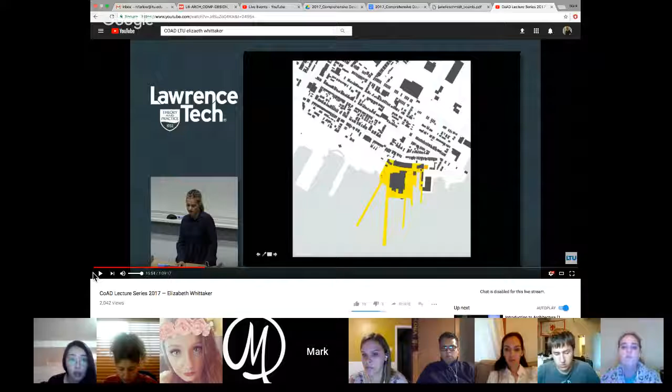Like Beacon Hill, but very much the triple-decker, which they surprisingly romanticize. But incredible views to the city, and it's really starting to boom in this area because it's one of the last frontiers that's still somewhat affordable. So we were lucky to get this project, which is right next to an active shipyard. The west side of our site, and the triple-decker flanking the east. So there is probably, just FYI, a six or seven months, sometimes longer, intense process with the neighborhood where you're meeting every month, showing them schemes, and a lot of opposition. And we were really thrilled after we talked through the narrative of the site and how much we loved the shipyard that they maybe had forgotten about.

Well, the architecture, and not just the architecture, but the modern spirit of this space with this artist community that actually works on these incredibly large and fantastic sculptures that you see here. This is right across from our site. That's our site before we built it. And so how could that become the actual stronger context? We work a lot in this historical fabric, which I think is why Bedrock hired us to work with them on Brush Park, because we knew we had to somehow marry these beautiful old mansions and the preservation of those with this contemporary architecture. So this is our site, again, flanked by the shipyard and the triple-decker. So there's a lot of this.

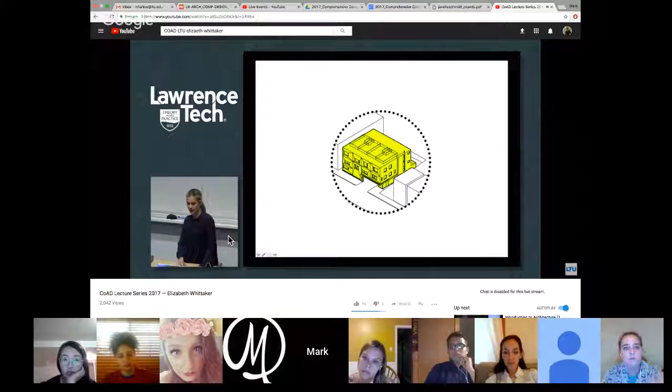And so what we did is we really had to maximize the front facade because that was our only chance of view and light. There's a back, but it's very much a back. There is no view, there's a little bit of light.

And then the tricky thing with housing, so we really geek out on unit typologies and the kind of unit. So we think of them in a very pure way in the beginning. Is it a floor through? Is it a maisonette? Is it a flat? And so on. So we had to put 9 units in this project, which was super tight. And then we had to incorporate 2 means of egress.

And I know you might glaze over, but these particulars of housing are really hard. And Europe doesn't have to do it. And so therefore they have really amazing housing, and it's really tough, sometimes it's not, but often it is, to incorporate this, in this case, a cross-grain common corridor through the units. So how does that work?

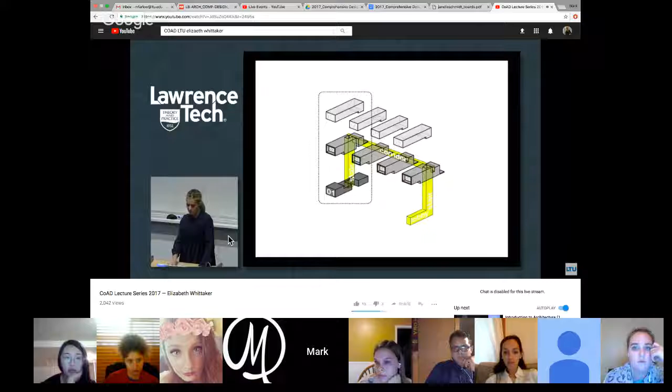So the good news is, as it often does in architecture, what is a problem becomes maybe its best asset. And it forced us to do these mezzanine units, which are really low ceilings, but voluminous because they open up to these double height spaces that face the water. So we literally went under and over this skewered common corridor through the building.

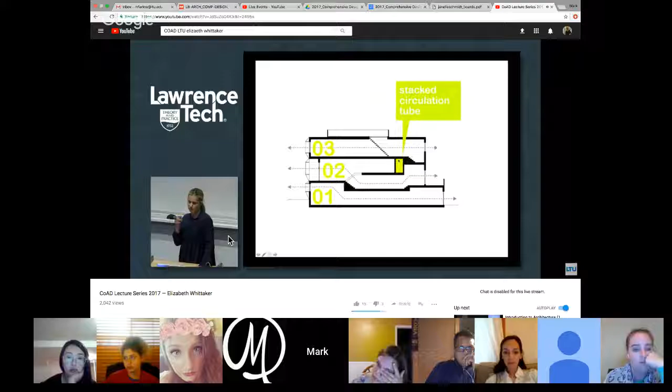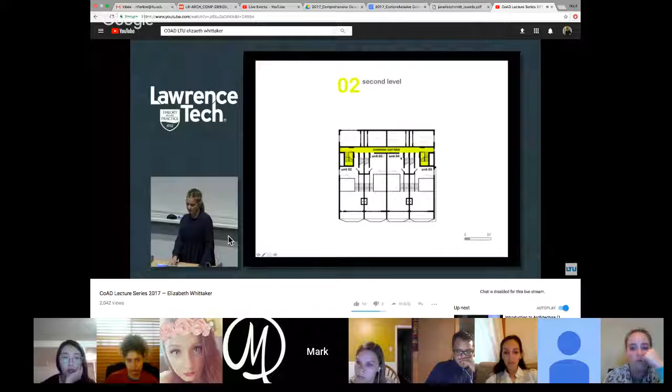And so ground floor, we also had to pack in 9 parking spaces, 1 for each unit, 2 stairs. Second floor, they still have private entries. It's the 3rd floor, the second level, excuse me, we call it the second here, where we have the common corridor that then accesses all the units. So you have to really figure out how to game code, especially in this country. And so this is how we conceived of it.

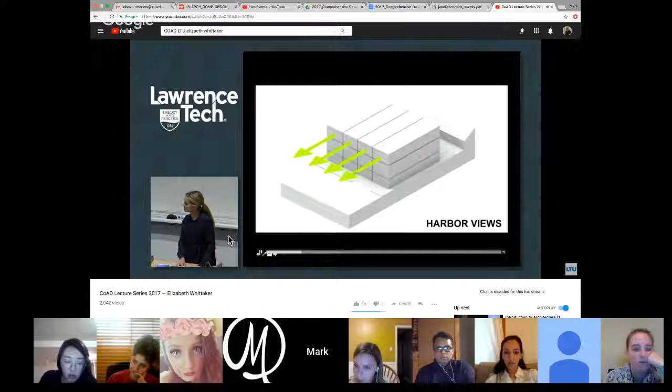So just a quick, simple animation about the 9 tubes. So we stack the tubes, if it's gonna go. Maybe not, okay. All right, maximize the views. Had to carve out for the parking. We could only go 3 feet below grade because of the water table. We're right next to the ocean.

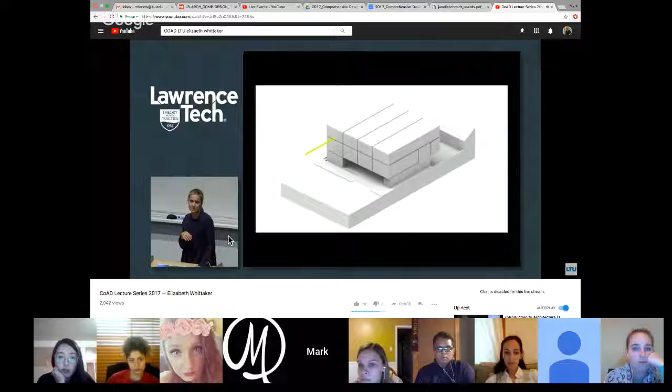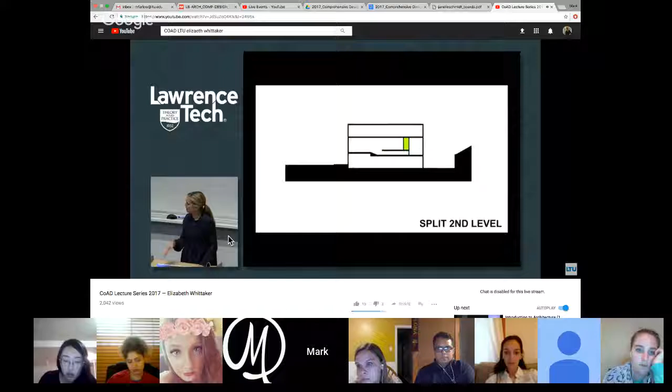And we could only go 32 feet, 5 inches because of an angry abutter behind us because we were gonna block his view. So we were literally shoehorned in every way and had to maximize every inch, which I, for some reason, find we often have to do with our projects, not so much with Brush Park. And then the idea was, again, to go below and above this common corridor to have these really great views out.

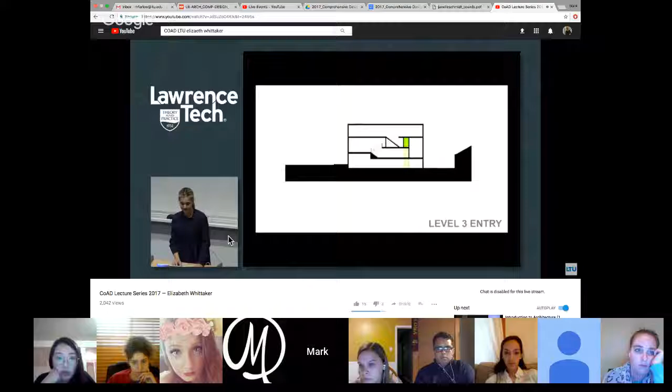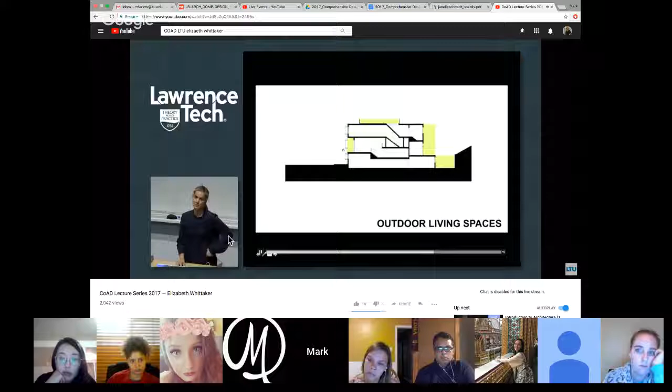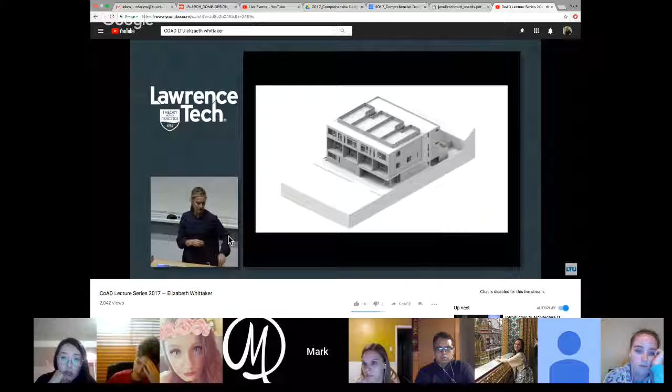And then what we try to do in all of our projects is incorporate as much outdoor space as we can get. And it's tricky in these tight zoning envelopes, but we built in a back green space, roof deck, and then these recessed balconies. So we love these balcony spaces and what they do to the streetscape and the whole dialogue with the street and the neighbor. When you're only 20 feet up in the air or even less, I think there really is a great dialogue with the pedestrians. This is a very pedestrian-friendly, active corner of the city.

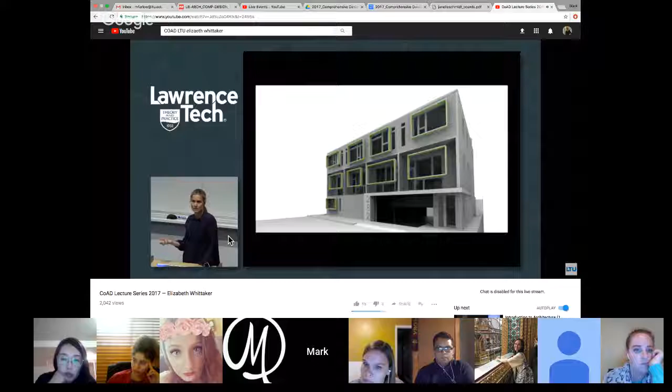And then the front facade, which I would say is the core project, other than the complicated section, is where we really brought out the aesthetic and the sensibility of our work. So the idea was to have something very modest like corrugated metal and red cedar, strategically red cedar, because even that was a high price point for this budget.

And then to distinguish the 9 units with these giant steel and yellow super frames, and then wrap this, we call it a shrink wrap facade, wrap the facade with the stainless steel mesh over these triangular gusset plates. So the idea was that it's figural, but it's subtle.

Not very green, as you can see from the shipyard. And it's reminiscent of the chain link fence, although it's a really nice mesh. It's from Germany, it's not chain link. And that was the way that we sold it to the neighborhood. So all of these projects have a narrative that we have to really bring the whole city and the neighborhood along with us on in order to get them through.

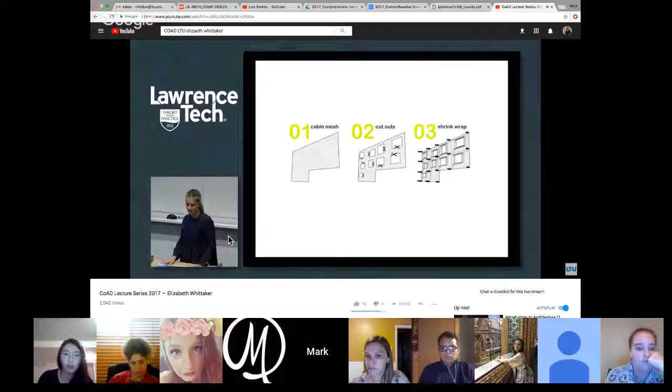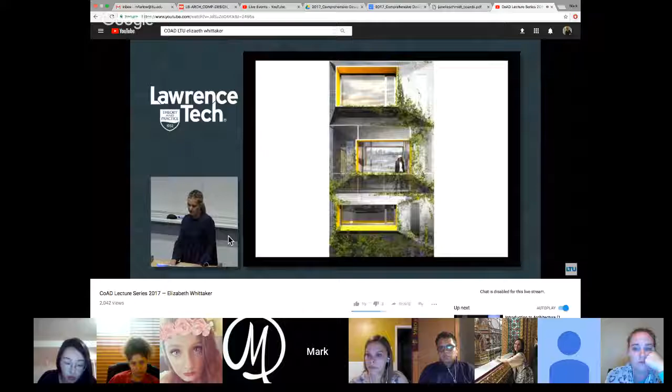So again, the shrink wrap facade, this is a quick diagram of the idea, a couple of renderings about the layers, and then how this could become a green screen over time. And then the tedious task of actually sewing the screen onto these gusset plates with this incredible steel shop and this man on the ground that used to work on boats and netting for boats.

So he was a great find, and actually helped us put this whole thing together. And here's the finished product. So it's interesting because what was so concerning for the neighborhood was the context and how this wasn't a triple decker. But since then, we're now working with another developer that bought the lot next door that we tore down,

and we're building another one with a Corten steel screen. And then 2 doors down from that, we're doing a third project with that developer. So we're trying to create a new context for this pocket of the city through these projects. I'm just going to show one tonight. And its closeness to the street and its proximity to the shipyard. And then a few images of the interior.

This is the unit that we thought would be so compromised. Actually, there's 4 of them. These became the best units because they have these mezzanine triple tier spatial conditions. And they open up to these double height living spaces and views out to the water. So we mix a lot of high-low. We will do really high custom components of our project and design them literally around IKEA or off-the-shelf cabinetry and so on. There's a view from the roof deck looking out to the city.

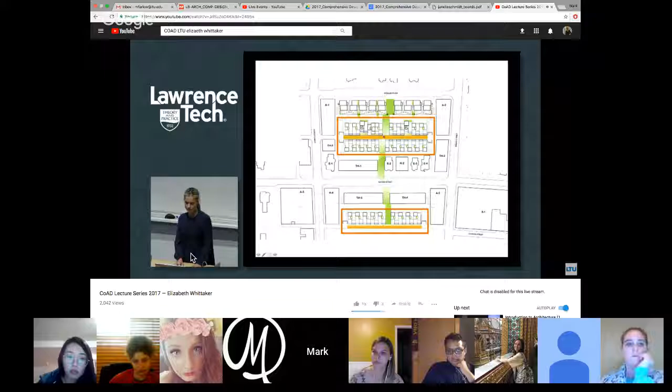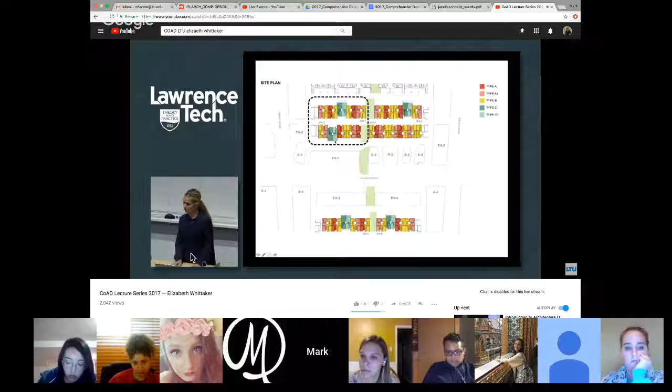So there's a lot of intersection. And we wanted to think of that as a kind of a macro and a micro idea. So just showing you a cluster. So this is our full carriage home scope. We have 6 of these aggregates, and they're about 10 to 11 units each. Zooming in on one, what we did is very much like the house I just showed you in Lexington, Mass.

We found a way to provide a courtyard as a kind of linchpin, kind of a void linchpin between each pair of units. Everybody got excited about that in diagram, and then we were like, well, how's this gonna work in terms of privacy and so on? So one unit owns the courtyard and has access to it with transparent windows. The other unit doesn't own it, does not have access, and it will have translucent glass. So they get the borrowed light from the courtyard, but not the access to it.

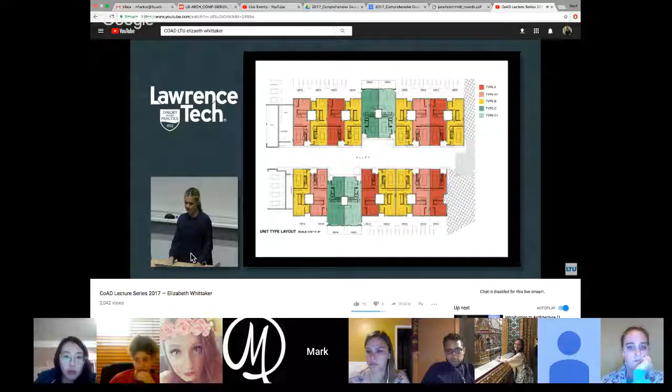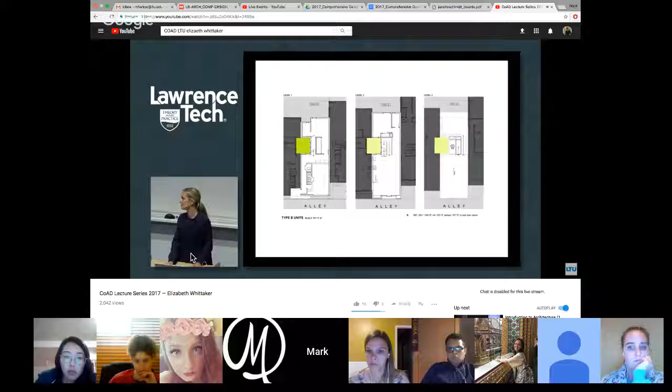And so, of course, those units will have a different price point. But the idea is that there is this mirrored relationship around these courtyards of these unit types. We created probably 3 different unit types and then a variation on 2, so 5 total. So it's not a copy-paste kind of housing project. We try to avoid that. We try to find economical ways to repeat enough that there's an economy of scale, but to make a variety of options and spatial and layout conditions for the buyers.

And so you hear about the 5th facade with the roof, but this is literally viewed from all the outdoor spaces and all the apartments from the 4 corner buildings. And with the undulating roof that we designed in this project, it allows for these really nice double height, 1.5 story height interior spaces. So here's a unit that looks into and owns the courtyard space next to it. Just a slightly different relationship on the ground floor. From the kitchen, looking into this green space where, of course, it'll rain and snow.

And then another unit type and its relationship to the courtyard. And then the formal studies of how we wanted to think about the roof. So not just as a really nice, not flat roof to look down on, but also how we could start to have this kind of back and forth and staggered outdoor space of roof decks. So the roof decks stagger from the north side to the south side, and then they provide this really great outdoor space for the people who are going to live there, but also this super lively landscape that's just, again, like 20 feet up in the air off the street.

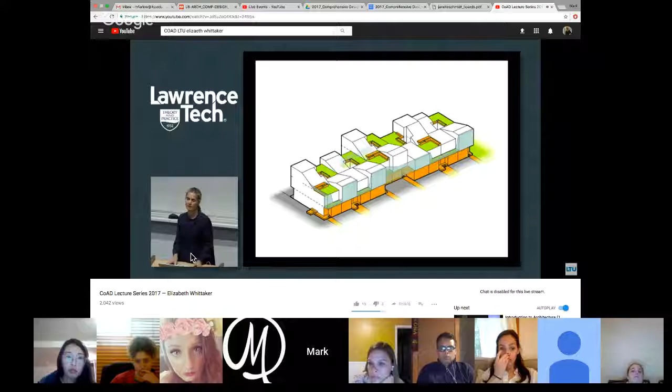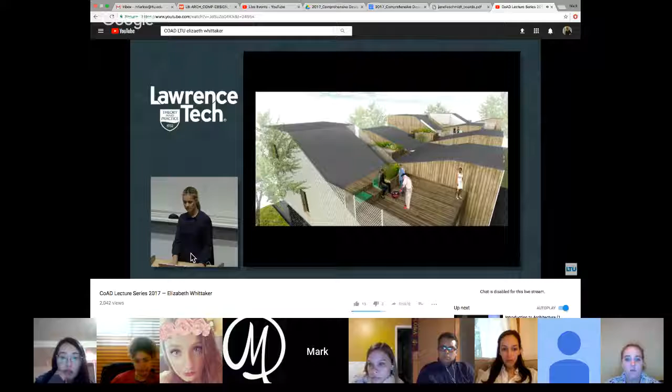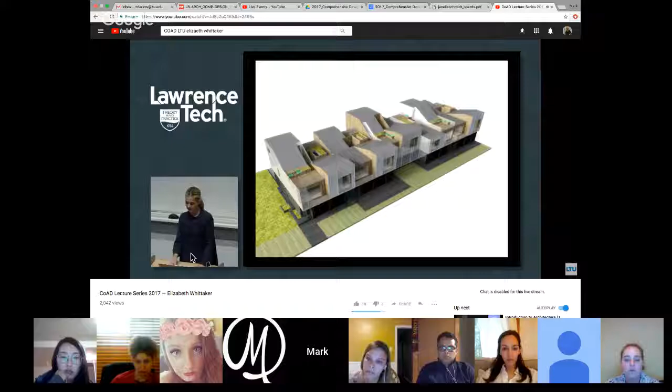And so here's how it's playing out, and it's pretty much going to look like that. We have a lot of red cedar. We're using the screen idea again that we used in East Boston, but differently as a growing screen. And then really looking at how these aggregates relate to and abut the alleyway, and how the back is going to hopefully feel like the front, and the front like the back.

And so here's a quick view looking down the alley where it's not very wide, you can imagine, but these second level shallow balconies, I think, will provide a lot of life down to this corridor. And then we're working with these pattern pavers to try and really enliven it and bring the geometry of the carriage homes down to the streetscape and the horizontal.

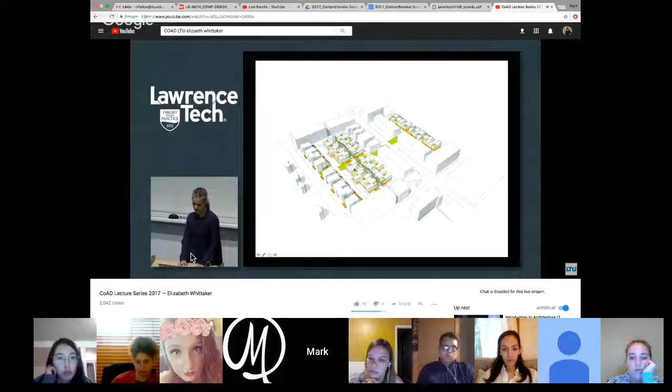And then a quick view of the back. So this is the north side that will face the south side and city side of the duplexes. And so how we deploy that, so this is the kind of thing, of course, no one's going to be up this high, but this is the sort of roofscape that you start to see when you're in one of these taller buildings.

And so next, the duplexes. So this is the front run. They only run on one block. The carriage homes run on 1, 2, 3. There are about 36 of these, and they are right along Edmond Street, and right across the street are 1, 2, 3, 4 of these gorgeous old homes that Bedrock is preserving and renovating. And so this one was a little bit trickier.

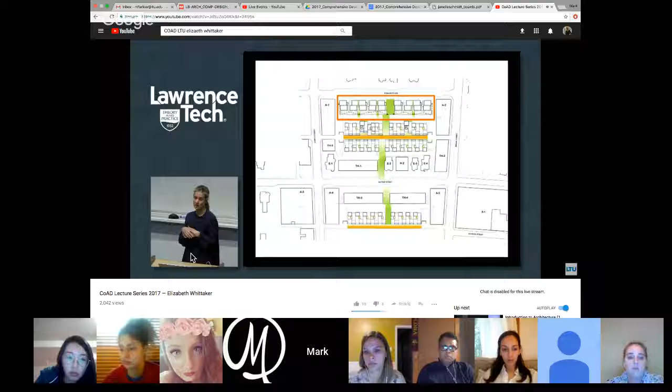So we had corrugated metal, we had mesh, we had some red cedar on the carriage homes. This one really was just a few feet across from these gorgeous Victorian homes, and there's a lot of brick. So we had a lot of early studies that were materially more like this. But I wanted to show this. We didn't land quite here. We have a lot more brick now, which I'm excited about.

But I wanted to show this image because this was an idea we had about really amplifying this idea of the mews at more of a micro level, between these duplex units, that you could filter through into the back of the site, into the body of the block. So we really looked at how we could filter people through the block, the residents and those that are pedestrians.

There's a lot of retail that's going to be on the corner buildings, not in our buildings, but on the LOHA buildings on the 4 corners. There'll be a lot of new retail. So we're hoping there are a lot of people from the city that are going to be on the site, not just the residents. So we initially looked at 2 different types. We looked at what we called the stacked and the banded. And these 2 run east-west along Edmond, and the demising wall is kind of in the middle of the chunk. And then the banded runs north-south.

And they had their merits. We thought we would go with one versus the other when we presented it to the client, but in the end, they asked for a mashup of the 2, which was tricky. We didn't design it that way, but now we have. We're thrilled, but it is very much this puzzly kind of Jenga combo of the 2 housing types, which I'll show you. So the stacked is the east-west slippage, and then how we started to morph it formally into these slots where people could pass through into the block, the common stairs.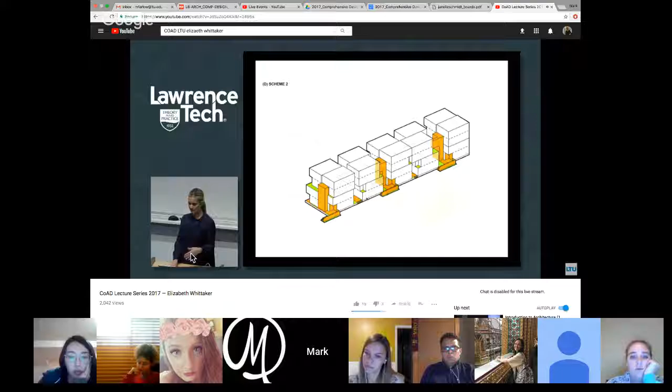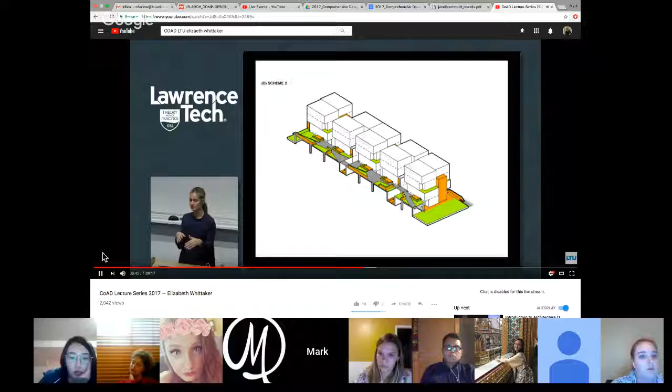And then the back, what we needed to do was provide a carport for parking, which is typically kind of a horrendous structure. So we tried to make something fantastic out of it, which was, not so simply, but conceptually simply, to create this landscaped roofscape that would cover up the parking and be this great outdoor space that's sort of private because it's elevated for those that live on the south side. And this faces the back side of our carriage homes. So there's a really nice relationship with all the roof decks and the balconies and the roofscape of the carport for the duplex.

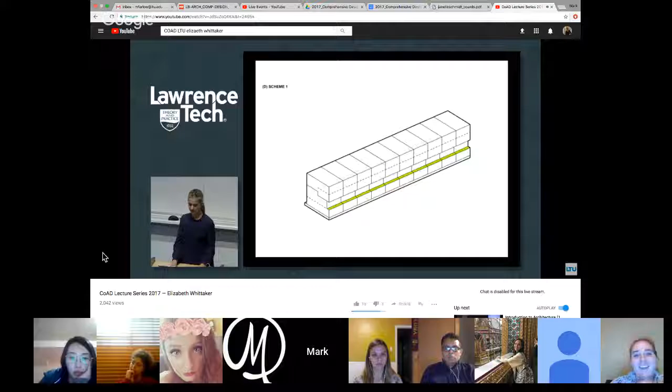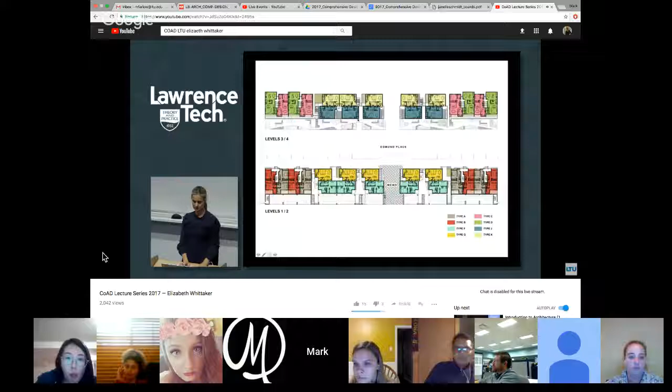And then the stacked is the north-south. Again, how we modified and modulated that formally to create this typology, and then how these 2 came together as one project. And so you can see it, I think, best in plan. This is the stacked, this is the banded. So the banded units bookend on Edmond, the east-west inside of Edmond Street, Edmond Place. And there are these gaps that are formed between the stacked units to allow for this filtration into the site. So just a quick view of the units, the 2 types, and how that worked.

So this is a very different, I think, sensibility than the carriage homes. I think they're related, but these are going to be mainly brick, and it's really an exercise in tone on tone and a kind of a subtle variation in the brick tone and the brick pattern and a little bit of the brick formation. This is the back side, this was the Edmond Place front elevation.

And so we obsessed over these end elevations and this idea almost of a still life collage, thinking about the elevation as kind of a subtle, thin layer on layer of the brick and the brick tone and the brick pattern. There's a little bit of the texture here with the brick pattern, and how that would start to feel like the massing is very blocky, but then the surface and the facades are a geometry in and of themselves as well. Very orthogonal.

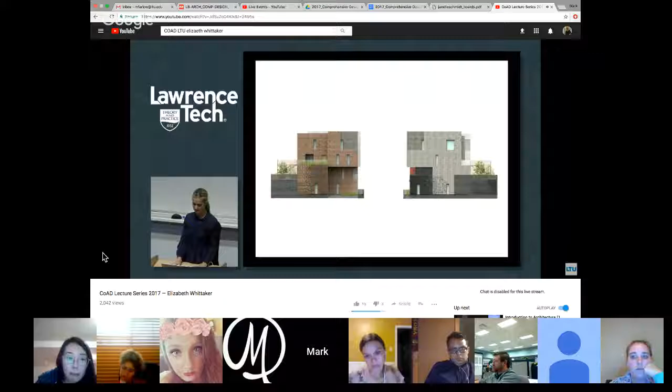And then how that relates to the historical brick screen that we're working with at the lower entry levels. And we have a screen on this project. This is the backside of the carport. This is the corner of the carriage home.

And so we found a contemporary pattern that's out there on the market that is a clover pattern, which when it's, of course, super small and multiplied throughout the entire wrap of the carriage homes and these strategic stair towers of the duplexes, looks very contemporary. And the neighborhood loved it, and they loved the association with it and understood that it was contextual, yet had its own voice. So.

Okay, so this was, I think, a really useful talk for you. I would encourage you, when you have another 15 or so minutes, go back and rewatch the presentation. Actually, the entire lecture is really good. But what I just showed you was, again, Brush Park, and before that, the piece in Boston, and I kind of leapfrogged over the house in Lexington, Massachusetts, although that's a beautiful project nevertheless.

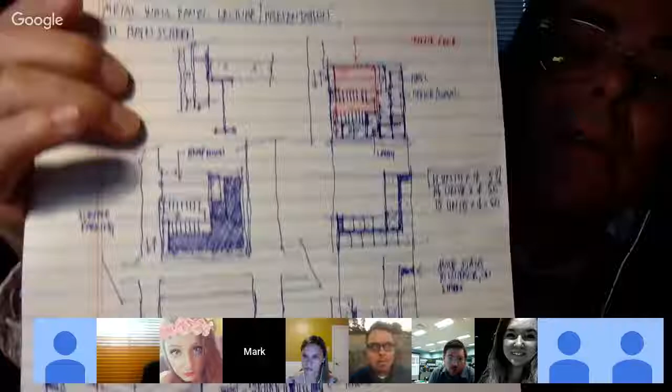Right? So those are my sketches done on the fly, almost to scale, showing how I would approach the sort of basic parti. I'm not so concerned about what you do on the ground floor, because I think there's only one way that can really operate. So I'll be very interested to talk with each of you about that this week.

And maybe you'll prove me wrong, but I want this step to be easy, because the steps that follow are really more important, and they are the core project. So I'm going to help you understand how to plan a project like this. But I really want you to focus on the remainder of the semester in terms of that core project.

So Lynn, I'm with you now, and I'm going to go to the drive that you shared. Yeah. I did just upload, a couple of my slides got scrambled. So when you open it, the site plan should be the first page. Where did it go? So, okay, so 7 is the first page for you. Yes. It did just upload to the drive, so it should be available to you in the correct order as well. So if I close it and go back to email and open it, yep, it's correct. Perfect.

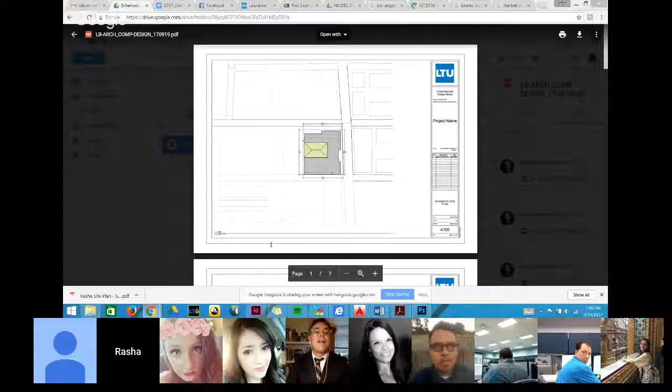Sorry, you want me to screen share? Yeah, I'm gonna screen share. My screen just went black. I'm sorry. Okay, I'm gonna screen share. Okay, so I'm screen sharing my first screen. One more time. Can you see my screen? Now I can. Nope, it just went away. Can you see it? There it is. Oh, it just went away again. There it is. Oh, jeez. I'm sorry, hold on. Let me make sure that you're clicked on. Now I've got it. Okay.

Thank you. Okay, walk me through this. Okay, so mine is very conceptual still. I had a little difficult time with trying to orchestrate this entire thing. Got a little frustrated. It's tough. Yeah, it's tough. More like a lot of frustrated. So, okay, I'm gonna start.

This is the fourth floor. So I'm telling you right now, I don't have my basement plan or my roof plan right now. I'm still working on them. But I will say my roof is going to have a green roof. So this is the fourth floor. Could you repeat that, please? I said my roof is gonna have a green roof.

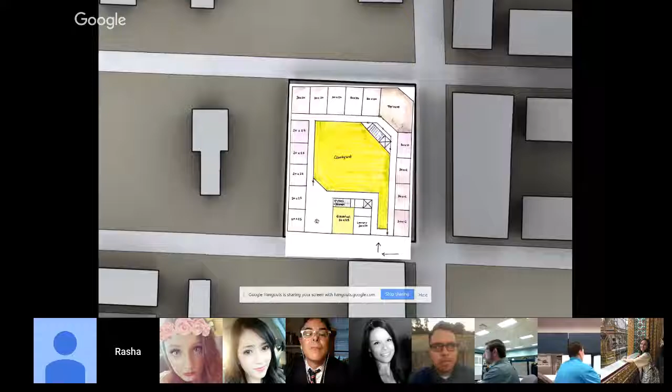Okay. I don't know why it's copied wrong. Sorry. For some reason, it didn't copy correctly. This is maybe easier for me. Yeah. Okay. Let's just look at this. Okay. All right, so this is the

third floor, and we have the double height room over here, and a terrace looking towards the alley. What I'm really trying to do is take advantage of the alley, not just have it there. I'll talk more about that once we get to a lower floor. Again, my core here, and more units around. There's fewer units over here because I have an indoor community space, but still with that outdoor terrace shareable with the rest of the units.

I really appreciate these drawings. I love that they're drawn by hand. But I'm having trouble understanding where the boundary of heated and cooled space is. And I'm also struggling to understand if there's a courtyard on each floor, or are we going to be seeing a multi-story atrium space? That's not clear to me yet. It's multi-story, so it's not on each floor. It runs down. It's a multi-story atrium.

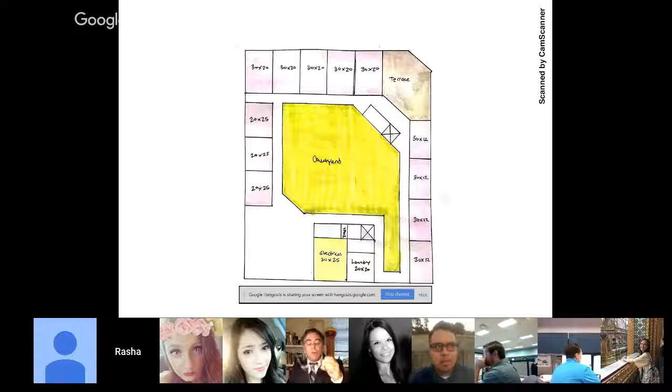And again, over here, you can see the same thing, all this space right here, there's nothing here. I just wanted to make sure everything fit within the site itself before I could really move things in and out. Right. Having made that conclusion, Rasha, do you feel like the footprint needs to be smaller? Potentially, yeah. Okay, or are you going to try and keep the same footprint and maybe resize the rooms so they take up more space, or add more program on each floor so that it's more functional? I'm just wondering how you were going to react to this observation.

So the room sizes, I've broken them up into 3 different room sizes: 30 by 20, 30 by 12, and 20 by 25. And I came to that conclusion by looking at some of the case studies that we found, and I went through their floor plans to see how large they made theirs, and I compared it to what we're doing. Gotcha. I don't think I want to go any larger than what I have, nor smaller. I'm also trying to keep in mind that these are older people, and with a larger footprint of space, it's harder to maintain. But at the same time, you don't want anything too small where they can't maneuver around their home.

The footprint being smaller, that might happen with the parking, because right now I'm having all 50 below grade, but I have to think about parking for the retail units on the ground floor. So potentially bringing it in more, and then having available parking for those units, the tenants that will be there. So you've drawn this to scale, right? Yeah. While it's drawn by hand, freehand and straight edged, it's all to scale.

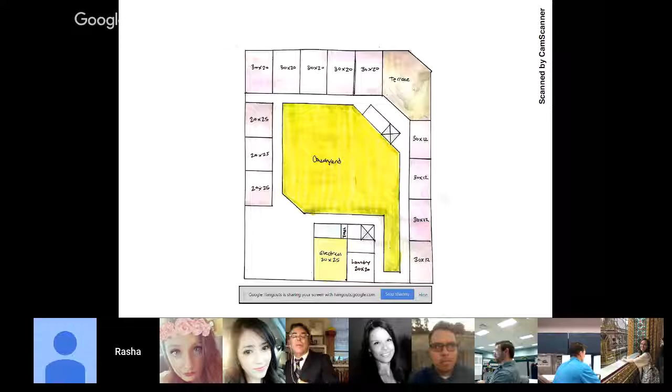But it feels to me like the frame of the building and the tendency to arrange lots of small units around the outside of the building has created a much larger courtyard as a subject. It's a really big driver for this project. And I feel like when you get into the actual unit designs, you're going to go, wow, I need to revisit this. And I hope that the courtyard can still stay in play. I think that would be good. Okay. Yeah, that makes sense.

I just didn't know. So do you have a first floor yet? Yeah, well, where's the first floor? Okay, so the thing with my first floor is I'm looking to see what I want to put on the first floor, so I can decide the sizes of the spaces and how they work around the courtyard. So I do know I'm looking at a yoga studio as well as an exercise room, because seniors need to get their exercise in. Nice.

So I'm looking at combining the two. So this is the residential exercise room, but it's attached to the yoga studio. And I wanted these on the ground floor here, so they have direct access into the courtyard. Yep. So if the yoga instructor wanted to have class outside for a day, for example, or these seniors wanted to do some lightweight exercises right out here, they could do so. And they have direct access into it. So, yeah, I love the idea.

I'm looking at the dimensions, 30, and that's actually kind of the same depth of the units up above. So yeah, it is. Some of these numbers aren't quite right. So it's the same as up above. So I'm probably going to have to move all of them this way to the left. Yeah. So they get deeper. And that's what I'm saying. The courtyard is going to get smaller, right? I think that's going to be a condition that ends up happening. And so you just have to continue to.

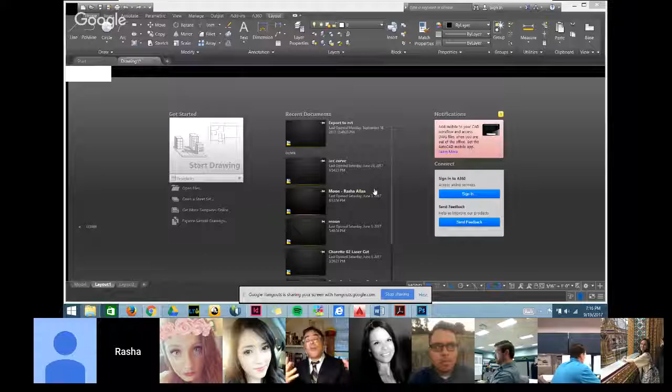So I mean, draw to scale, draw accurately, and I'm not sure if you want to continue drawing by hand. I like the drawings so long as they are truthful in their scale and proportion, and that they as a drawn thing represent the idea of the thing. So there's that correspondence. Is drawing by hand something you're really comfortable with? It seems like it, but I want to ask you that.

I enjoy drawing by hand for this first portion, because I scribbled over so many times, and I feel like if I did it, for example, in Revit at first or SketchUp, I wouldn't have had the ability to change it so many times. So yeah, I understand that. Look, I fully comprehend that. I just want you to, when you draw, think of onion skin and its transparency as an asset in the design thinking, so that stairs are always drawn the same footprint all the way up.

Elevators are in the same place all the way up. And when you say a long, narrow room that has the proportion of the yoga studio and it says 30 by 43, that same proportion has the same dimensions for the apartments upstairs, for example.

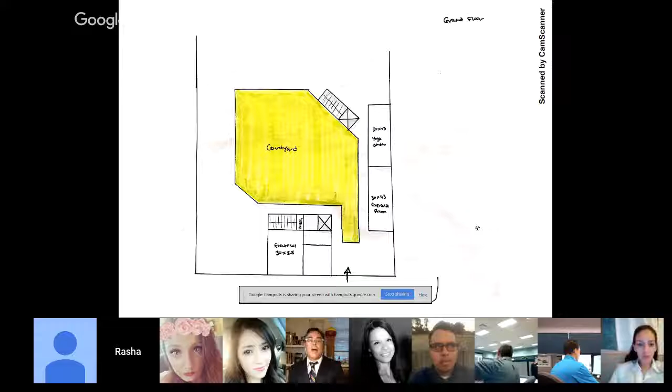In my mind, the street walls, Rasha, are prime real estate for program, right? Like lobbies and retail, and those sorts of things. And I would get that ramp as far away from the street as possible. And the only place that happens to work is where Lynn showed it, which is where I showed it in my sketch, at the west property line, so that it doesn't impact anything along John R. So don't resist that suggestion.

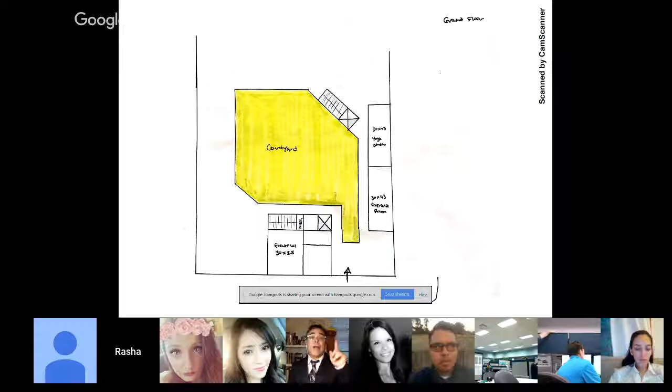It's more important that you make this work than it is for you to come up with a brand new concept. Okay. That's probably completely opposite of anything any professor in a design studio has told you, but this is live, this is recorded, this could be shared with all of the professors and the dean, and I'm just going to say it. I'm not interested in you inventing a new first floor plan. I'm interested in you focusing on all the other things. And I think there's only so many ways that you can approach the first floor. Like one way.

Can I screen share now? Yeah. Okay, so I'm going to show you my layout. Oh, no, I didn't mean to do that. I'm so sorry. I forgot how to do this. So how do I? No, I don't want to screen share. I just want to hold something up. So, you know, that's my notes.

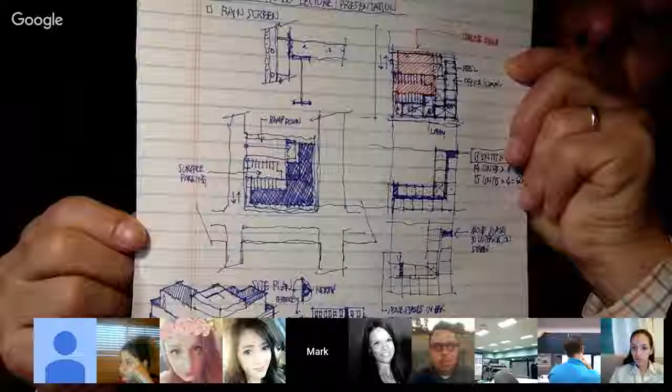When I was listening to Ash talk last week, I thought, if I was going to do this thing, this was my site plan. This is the alley right here. I came in off the alley, and along the west property line, I dropped the ramp down. I do have a space where I think you might be able to do some surface parking. After seeing Lynn's layout today, I'm maybe less confident of that. But the hatched blue ink is kind of all of the ground floor.

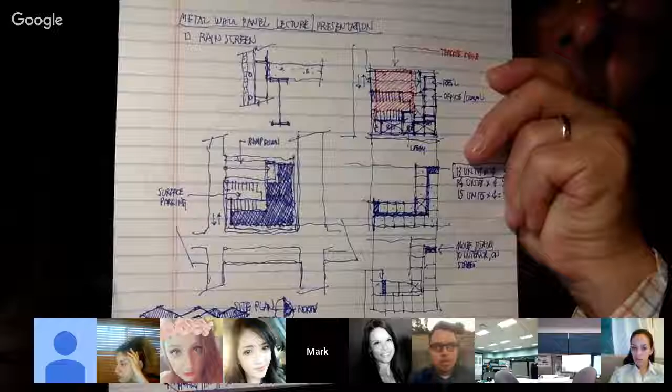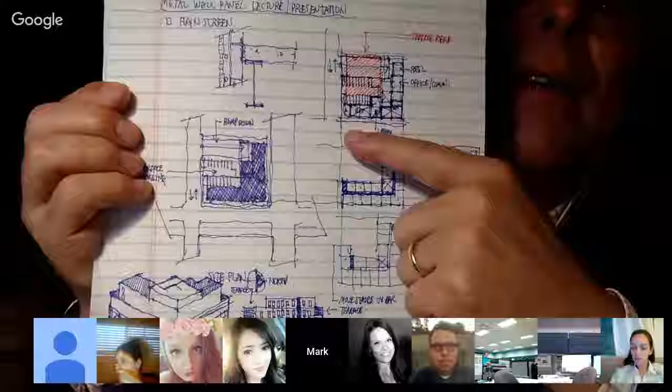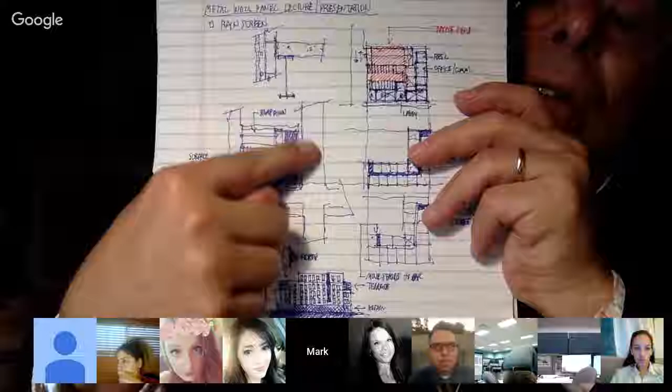So I kind of feel like basically that general partie for the site plan is the only partie, because you really want retail exposure, lobby exposure on these two streets only. Yeah. You can't do any program here, really, because it's the neighbor to the west, and then there's the alley, which you need for access.

It may be bigger than the inked area that I've got. It may be smaller. That's certainly something you can create. But it just seems like if you go with that general footprint, that general attitude, because there's still lots to solve in doing that.

Because you don't have to do an L-shaped configuration of units like I did. You could do a U or a C like you saw Lynn. It could be a T. It could be two I's, or two bars. So it could be really anything it wants to be. But I really want to help you solve that first floor efficiently and move past it. That's not the point of the project.

Yeah, the first floor was, well, not a little bit, it was challenging. I could tell that. Yeah, but I'll definitely look. I mean, currently I have a C. That's what my units are right now. But it'll just depend on once I change the sizes of them and how I can figure that.

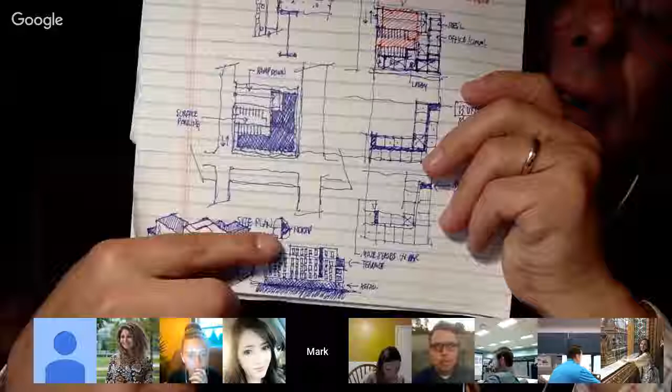Mm-hmm. The shaded part of that L. Actually, let me do this so I can see it. Hold on. Okay. So the street is this and this. The alley is parallel to the street. The residential property line is right here. Right? So north is this way. See, there it is. North. I always draw the north arrow, even when I'm drawing quickly.

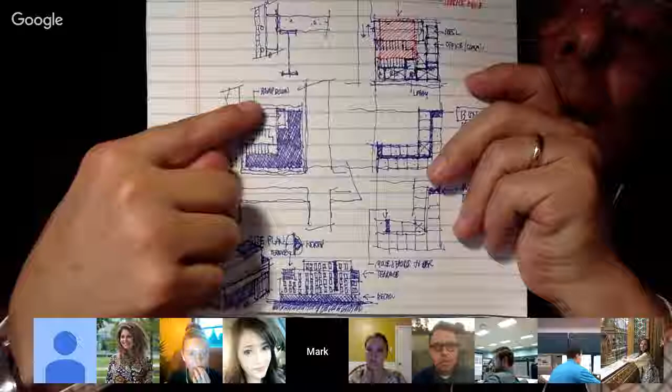So what I did is I configured program in an L shape along both streets, and that freed up a void space in the site, like this, that allowed me to come in off the alley, turn, and go down quickly to a ramp below. And if you look at Lynn's drawing, and I see Lynn is here, she actually has the same thing.

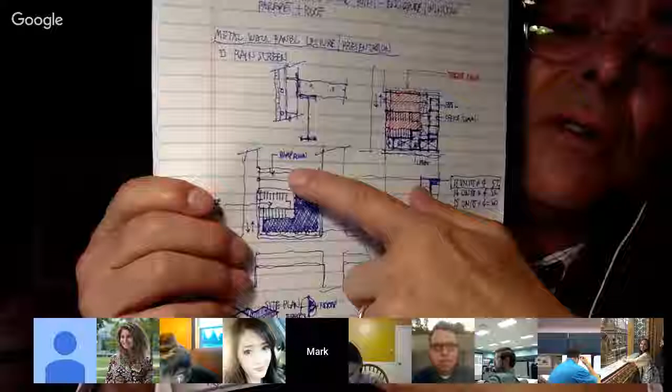Lynn, can you tell me the length, please, of your speed ramp from the alley property line until you get that moment of head clearance? And can you tell me what the overall length of the ramp is? I think she's computing that for us right now, Paige. Mm-hmm. Unless she didn't hear me.

I had my original drawings oriented the way you did, with north facing right. But in turning them for north being up, I might have messed it up, because the purple spaces on the ground floor, like where the vestibule is, that's supposed to be the residential line.

Yeah, so you've got to keep the north arrow in play with every drawing. It wouldn't hurt to put it on each drawing, each plan, but you could get away with doing it in just one place, because I think you kind of lost sight of the context. So one thing I would always do, even on the basement plans page, is have the property line, and on the ground plan, have the street names. Because you want to make sure that even some bonehead like me can look at it and know exactly where you are, right? Okay.

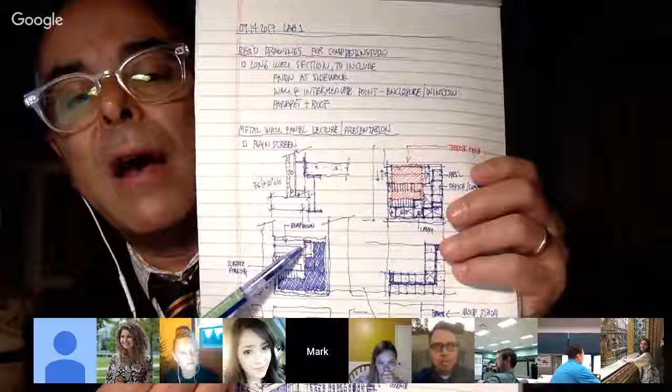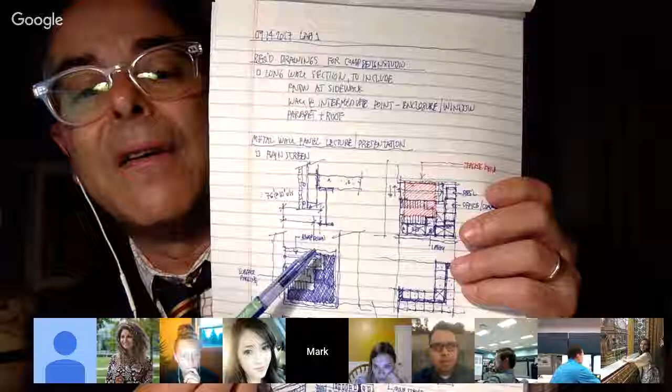Thank you. And then Lynn, when the ramp runs down and it hits its first header in your building, what is that length? When it hits the first header, I have about 7 feet clear for vehicles. That's okay. But I mean, what's the length of the ramp at that point, where you can have first floor program hovering over the ramp? Right. I have first floor hovering over the ramp at 53 feet. Okay, thank you. Thanks for that. I appreciate it. No problem.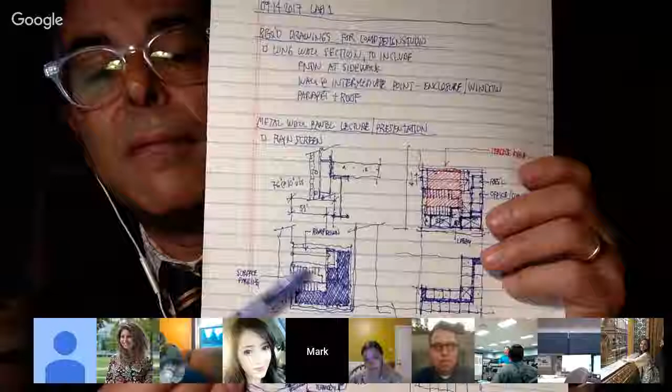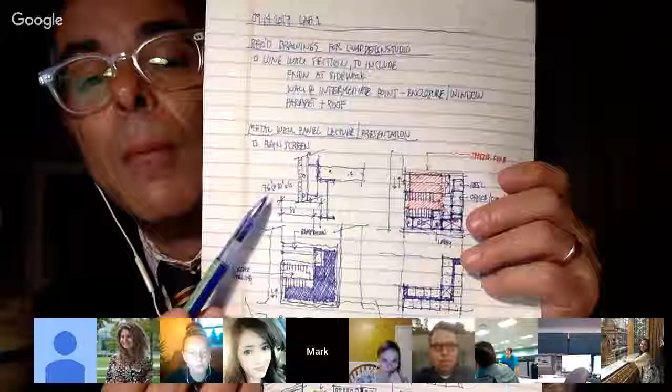So Paige, what she's just saying is, when you bring the ramp in off the alley like this, that ramp is 53 feet between the point where it starts to slope until it hits a wall or a parapet or a face of the building that's sitting on the ground floor. But overall, that thing is almost 77 feet, 76 feet. That means it goes all the way into the basement. So your ground floor plan has to show that footprint taking a bite out of the occupiable, usable ground floor.

And it's my belief that that ramp has to be perpendicular to the alley. It's also my belief that that ramp has to be parallel to the residential property line, the so-called west property line. I think that allows for first floor program, which is retail, mail rooms, lobby, exercise, anything that you're going to put on the first floor, to line and conform to the L of that street intersection, so it fits on both streets. Okay.

What is the width that you would recommend for this? The ramp, I would say, no less than 20 feet. I don't know what Lynn drew it at, but 25 feet would be great. Yeah, I drew mine at 25. Okay. Because at the bottom, you've got people turning and then going up, and people coming down and turning sharp to go right. So 25 feet is a little bit more friendly. Okay, I forgot how much space I had left in the back. I only left 16 foot, so I can make that bigger. Yeah, and when you draw that ramp coming into the basement plan, you're going to have a different configuration for parking. You're going to need to show that. Mhm.

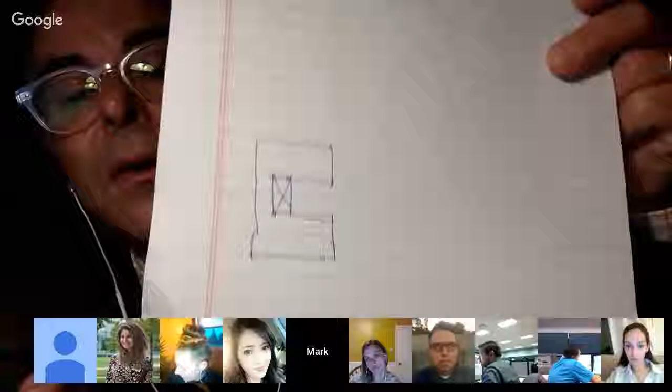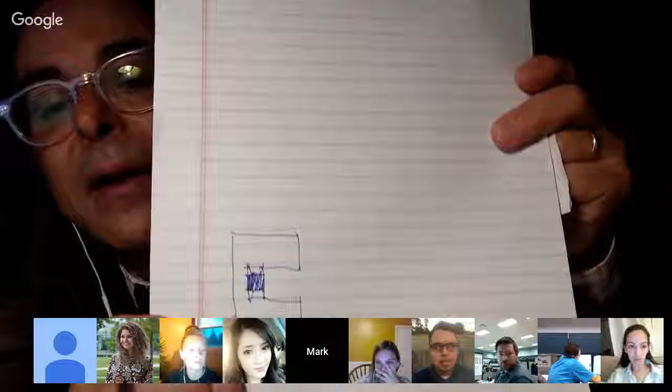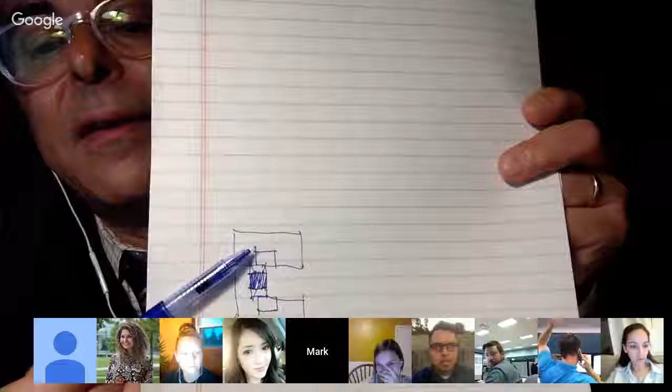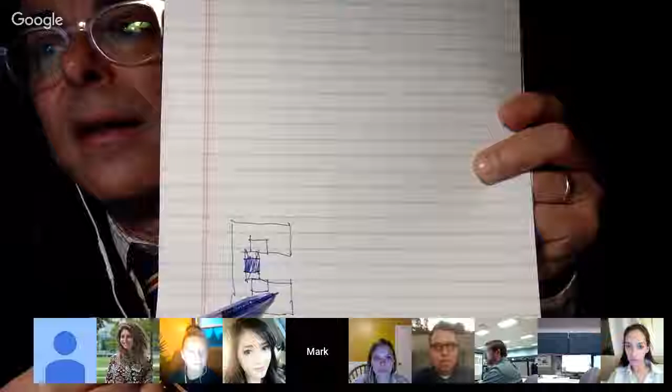So here I'm going to sketch the suggestion I'm making for you right now, real quick. I'm saying kind of do the 2-bedroom like that. Okay, yeah. Right? Or maybe it's not that big. Maybe it's that big instead. Okay. The other thing I'm a little concerned about is the unit that's kind of straddling this unit. Right? So that part of the unit is dark. Yeah. And if it could slide, that would help. But I can see that there's program that's impeding that slide.

So you're right in the thick of... Beth talked about geeking out, right? You're right in the thick of the geeking out process of making this stuff work. How have you drawn this? What's the software you've done here? I brought a CAD file into Illustrator. Gotcha. So that's perfect. That's how I would have done this, because that's what I'm really comfortable with. But at the same time, it works for allowing you to color code it and give it some notations and dimensions, which I think is good.

Would it be beneficial? I just realized this. If I took those 1-bedrooms that are straddling the 2 bedrooms and put the stairs in the place where that 1-bedroom would be dark, so that takes up no facade space. That would work. And then that'll eliminate the other set of stairs that I have in the middle. Mm-hmm. I also think that there's some room to adjust because it looks like you've got 1, 2, 3, 4, 5, 6 elevators. You really only need 2. Okay. And they want to be central, I think. That just means central to or equidistant, right? Yeah.

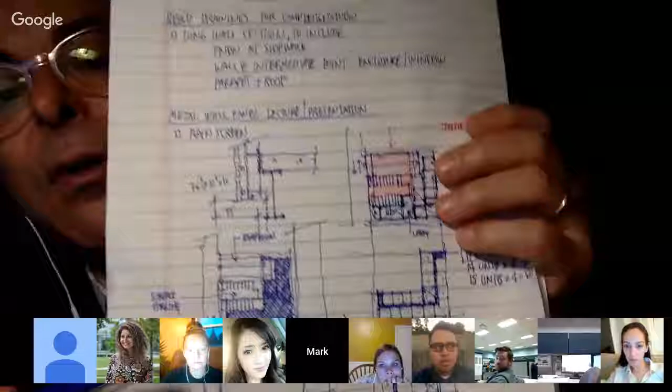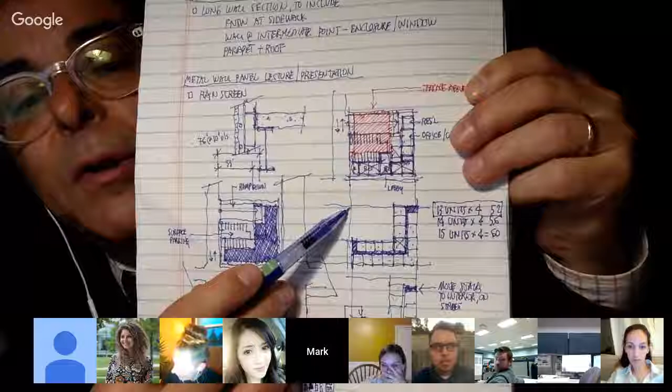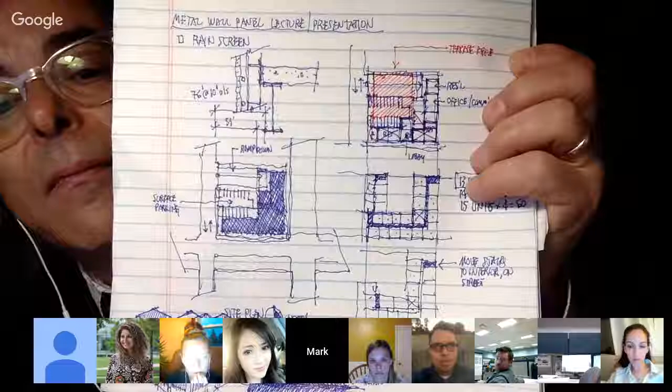And I didn't do a U-shaped building. I did an L-shaped building. But if you look at like this plan here, you see that? Mm-hmm. This is the stairway. That's a stairway. The elevator would be in this X area with some mechanical stuff. And you can see each of these would be the units. Okay. There, and then from here to here. So an L-shape would transform into a C shape by doing something like that. Okay. All right. Yeah.

It's a puzzle. You guys have to really think it through. And the easiest way for me to do that, like if I was drawing this in CAD, and I've done this, okay? I've set up layers in CAD that are level specific, right? I might call the layer LVL-1_walls, and then LVL-2_walls. And I can freeze and thaw those layers to see the relationships as I'm moving up or down through the floor plan page.

And I think that's another way. So you draw the plans quite literally on top of each other. Okay. And things that are common throughout the building, like elevators and stairs, right? And only 2 elevators, right? Then they're always in the same place, right, Paige? Yeah. Okay. Cool.

I'm trying to think of what other questions I had before. Well, I guess I'd say I think you need to draw things like the elevators and stairs correctly. I think you have to draw the speed ramp into the basement and lay out the parking. I think you have the essence of how to lay out the units in a building like this. So I think that task of reworking that plan will be pretty straightforward.

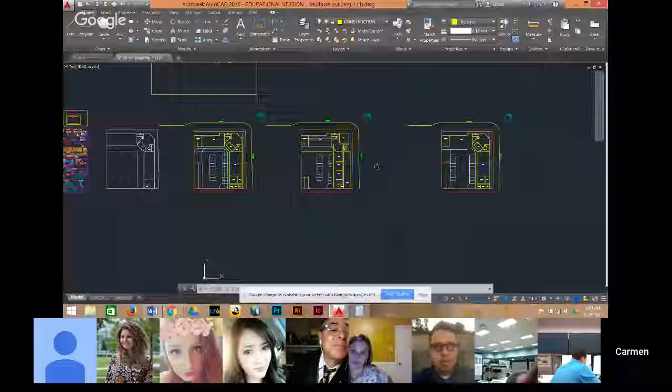Okay, so it's this part here. So above is Alfred, John R. Alleyway is... Can you zoom in just a little bit? Yeah. So right at the corner of Alfred and John R. is where I am placing my lobby. So it's an easy access from both streets. Then I've got retail on Alfred Street, and then I've got retail on John R. Street, which would be here and there.

Yep. So let me give some immediate feedback. Yes. I would try to put the elevators right next to each other. Okay. Would make the lobby really, really small. No bigger than the stairs, quite honestly. Okay. So you've created a lobby of proportion and grandeur, the size of like an office lobby. And I love that it connects from the corner into the back of the lot, which I think it needs to do, but it's

also really, really big. And honestly, I think that the lobby shouldn't be on the corner. Personally, I think the lobby should be on the street. I mean, it can be there, but the corner is a really valuable retail condition. Yeah. So can you pan over to your basement plan? I do not have that ready yet. Can you zoom out a little bit?

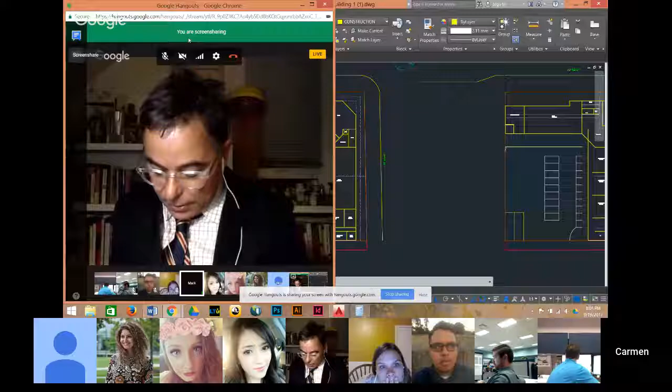I'm going to do this. You can do a drawing. I'm going to stop sharing so I can see. Right. How do I unshare? Just hit stop. Okay. Yes.

So this might be the plan. And that would be the ramp going down. Yeah. And at some point, that ramp's going to have to discharge. Oh, I drew the arrows the wrong way. I think I just went to England for a minute.

Right. So it's going to discharge. So there's an area where it makes sense to do lobby and elevator, those kinds of things. And I think it makes sense to do it in places like that, along the street, one or the other, but not both. Even if it's on the front facade, like you were saying? Yeah, that's not ideal, but if you can embed it a little bit, that will help. Okay. They're generally going to be here and here. Okay. It's tough, but it can work.

I don't know why I've been having trouble, I've done a U and then I've changed it and then I redid it, and then last night I was like, oh no, I'll put it in the corner. So I've easily gone through six sets. So what I would try to do, you guys, is lay out the basement space. You know how long your floor to floor is going to be. You can set that. That's going to generate the ramp.

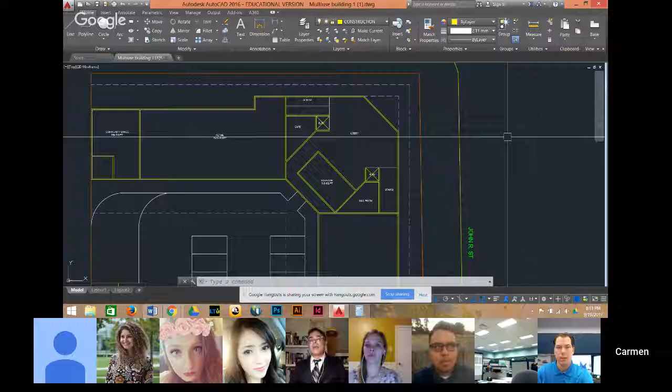But what I'm trying to say is you should keep projecting into the encroachments to a minimum, to keep them to canopies and awnings, balconies, but you can extend only up to the property line at the first floor, or if you hold back at the first floor like you are, then you can go to the property line at the second floor and above.

Okay, so here the orange is the property line. The dash line was what I was thinking of, a canopy or more like a balcony. Well, I think that can go out to the property line. You have a much bigger footprint that you could be working within, right? I think the yellow outside line work can actually go to the dash line. Well, this is the 10 feet that it's asking for, and then this is the adjacent building, which asks for exactly this kind of stepping. But do you have to take it for the whole length of that property?

Could you repeat that again? Do you have to take it for the full length of that street property? Let's go back to... I'm going to go back to the building program. I have so much trouble finding the building program in this. I'm turning to, yeah.

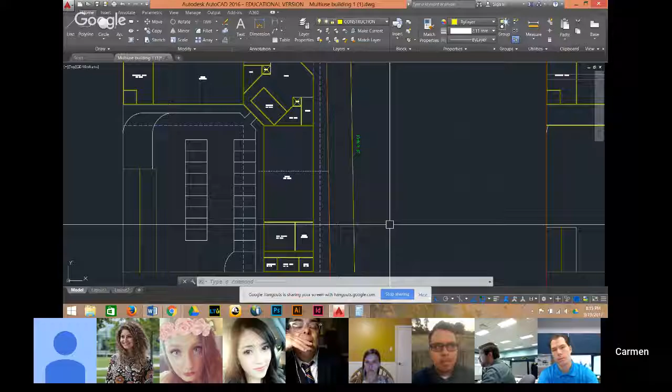But there's probably going to have to be a stair down there too, because you have to anticipate the residential units coming in from above. Yes. So that retail space is maybe a stairway. Okay. Yeah, let me go back to the drawing board. I think I like my overall L shape. Yeah, I think that's fine. I've tried it many different ways, and I feel like this is what I'm comfortable with and what I like, and it helps with my...

So I would make the parking spaces 180 square feet, which is 9 feet by 20 feet. But Lynn shared something with us tonight that I think is kind of interesting. She deduced that perpendicular parking in the basement just takes up too much room, 20 feet, 20 feet, 20 feet. When you do angled parking, you take up a little less width. And over the run of drive aisles and parking aisles, that's important, because you're really trying to skin the cat in such a way that you maximize capacity.

So she found that one-way drive aisles and one-way parking spaces were an efficient way to hit the number that you all needed, and she put that speed ramp where you had it. Okay. Yeah, I think that works for the project. Just right at the exit of the alleyway, with our lot, it's easy. She just did it like you did it, but she drew that basement plan to configure parking as angled parking. I think she told me it was 30-degree parking. I'm sure she'd be happy to share that with you.